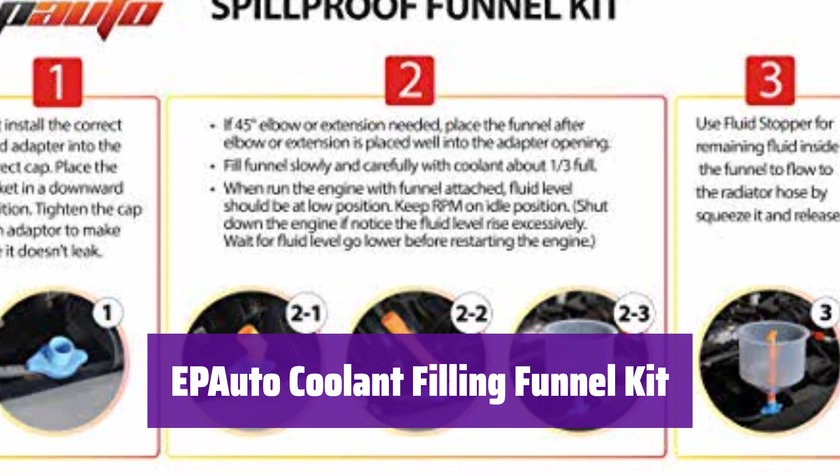Introducing the EPAuto Coolant Filling Funnel Kit. This kit is designed to make filling your radiator easy and mess-free. It helps you avoid spills and trapped air in your cooling system.

The kit allows color matching of caps for dedicated adapters. This feature ensures you're using the right adapter for your vehicle. It's a simple way to keep your cooling system running smoothly.

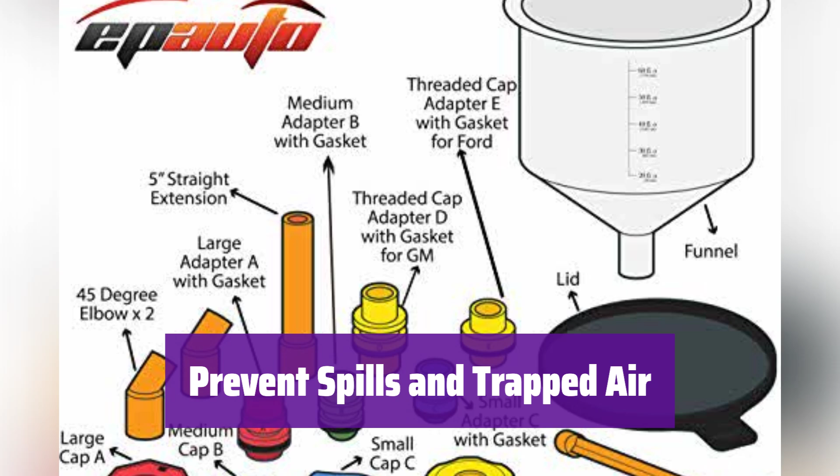This kit prevents spills and trapped air, which can cause problems. Trapped air pockets may lead to erratic cooling system and heater performance. Using this kit helps avoid those issues.

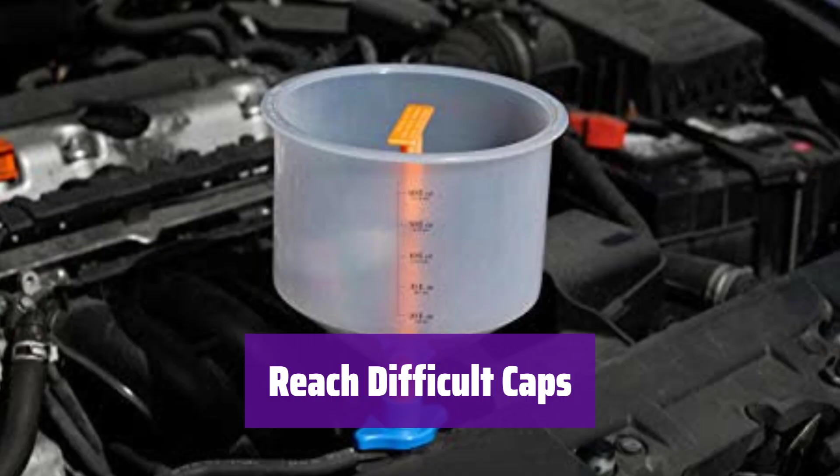The kit includes a 5-inch extension bar and a 45 degree elbow. These tools allow access to caps under shrouds or at an angle, making it easier to use even in tight spaces.

This product is protected by US Patent US1051919B2. You can trust the quality and innovation behind this kit. It's a reliable tool for maintaining your vehicle's cooling system.

What we like: this kit allows color matching of caps for dedicated adapters, which is very convenient. It prevents spills and trapped air. If you like a kit that is easy to use and helps you avoid trapped air, consider this one.

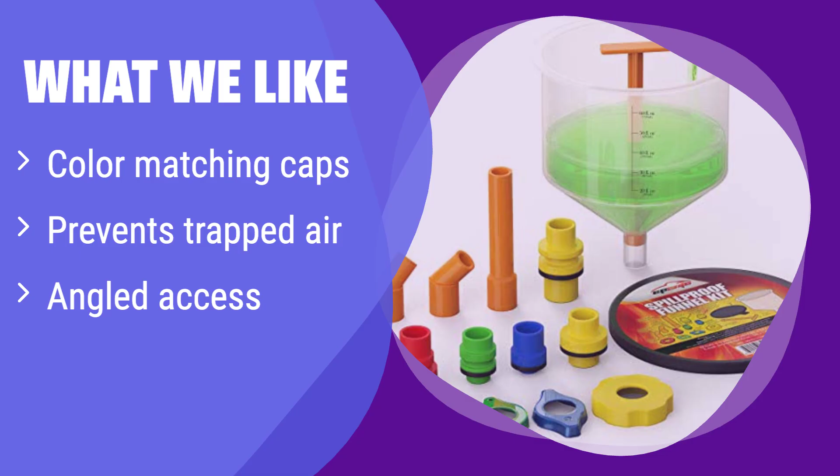Number 2: Thorstone 16-piece no-spill coolant funnel kit.

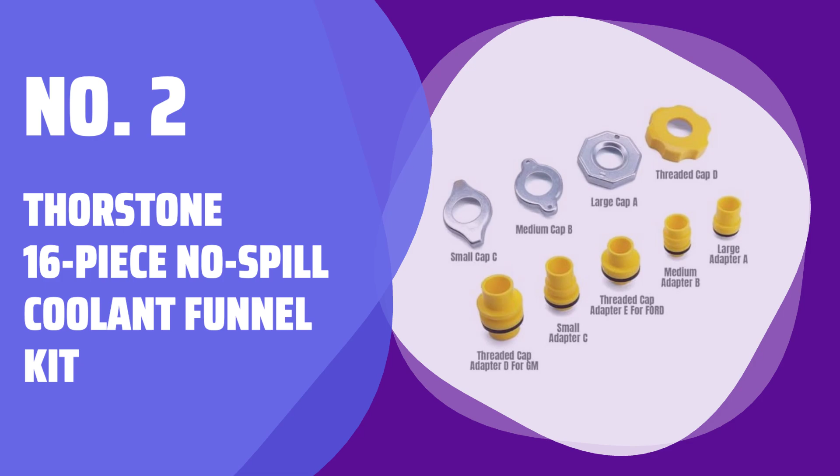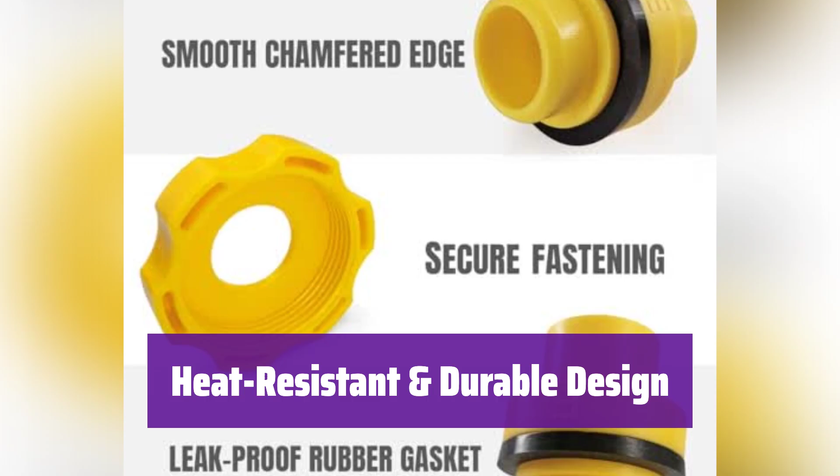This coolant funnel kit is built from heat-resistant ECOPP plastic, which can withstand up to 395 degrees Fahrenheit. The clear funnel design allows you to easily check fluid levels and refill coolant without spills.

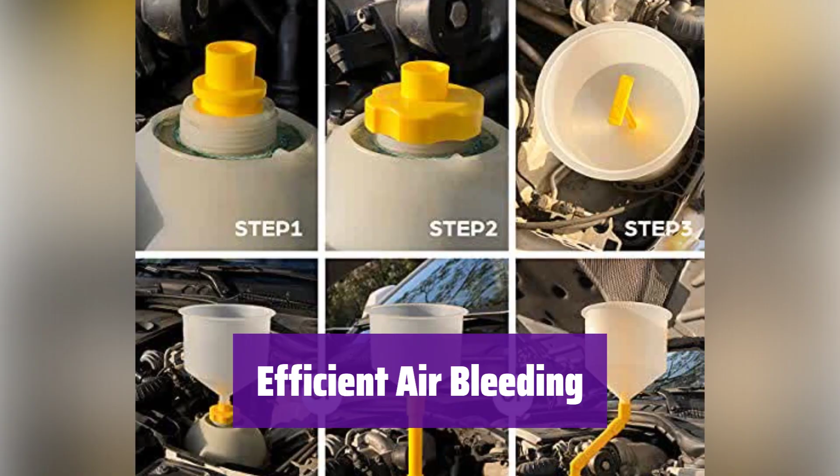This tool is designed for efficient air bleeding, preventing overheating after coolant changes. It's ideal for flushing systems and ensuring air-free coolant flow, keeping your engine running smoothly.

The kit includes a 5-inch straight extension and a 45 degree elbow for hard-to-reach caps. You can combine the components to suit angled radiators, perfect for various engine bays and tight spaces.

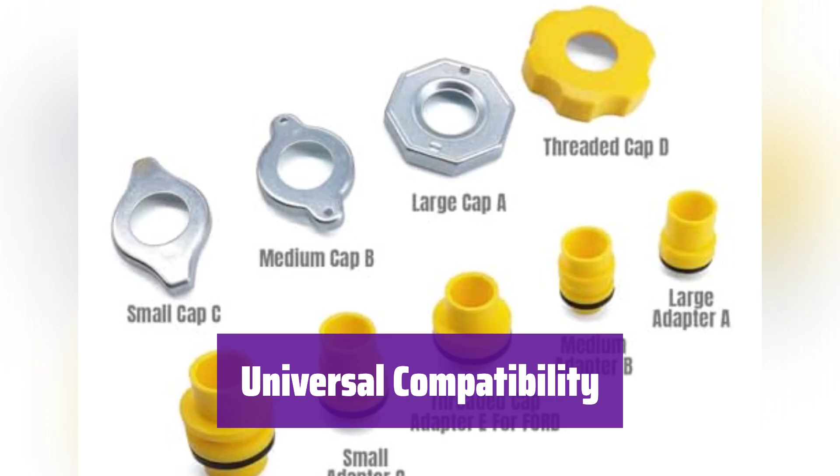It comes with 4 filler caps, 5 adapters, 2 45 degree elbows, 1 5-inch extender, and a transparent funnel. This kit is compatible with most import and domestic cars, SUVs, and light trucks, including GM, Ford, Toyota, and more.

Backed by lifetime product support and 24/7 customer service, the manufacturer ensures hassle-free assistance and satisfaction. They are committed to providing excellent service with every purchase.

What we like: this kit is built from heat-resistant material, ensuring durability. It is designed for efficient air bleeding, preventing overheating. If you are looking for a kit that is built to last and compatible with most vehicles, you should consider this one.

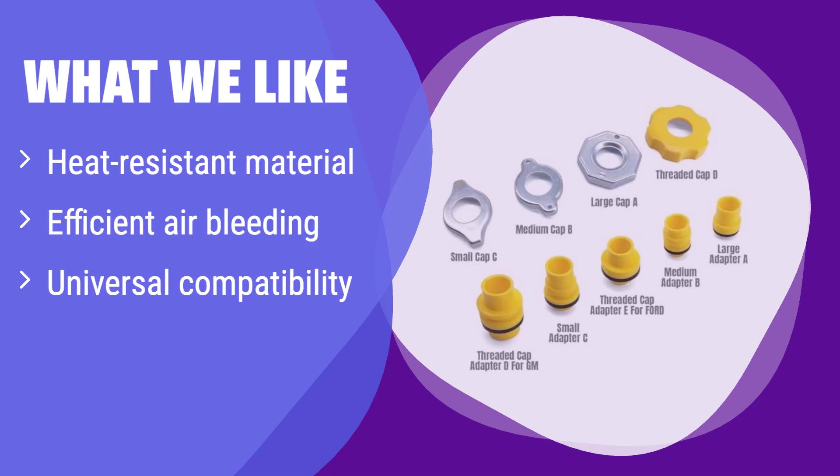What people say: it worked just like it said it would.

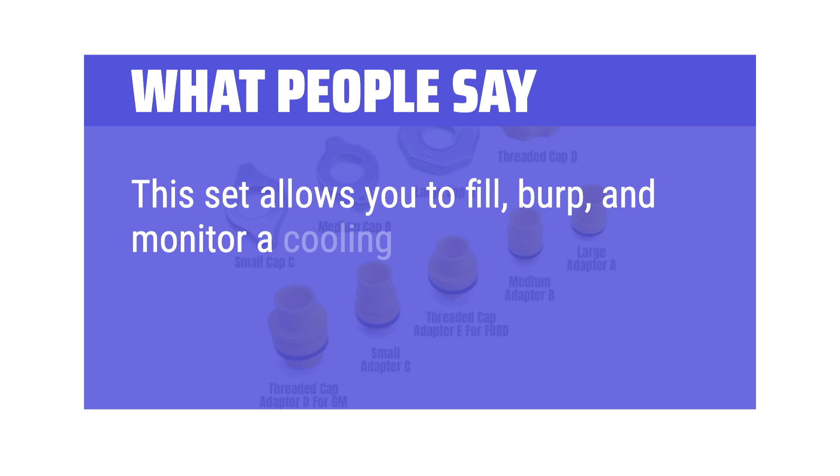This set allows you to fill, burp, and monitor a cooling system without spilling radiator fluid everywhere. Bleeding the system of air is possibly the easiest I've done with this funnel. All the adapters for different radiator caps, and the plunger to plug the funnel for removal with antifreeze still in it.

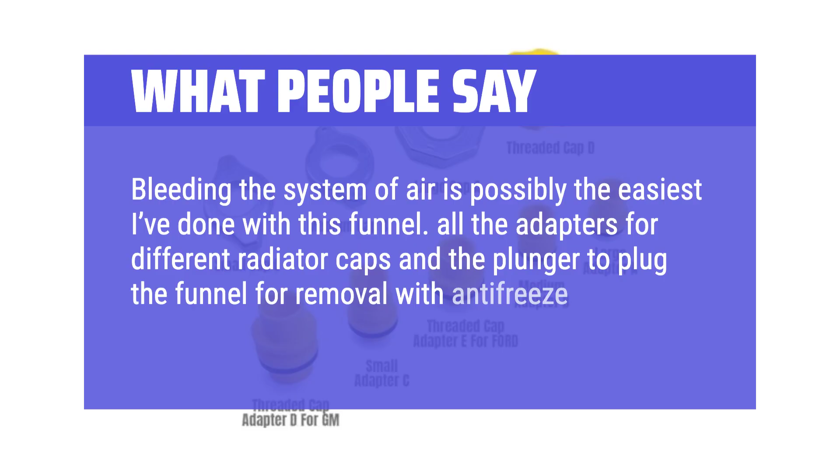Number 1: Ultimate No-Spill Coolant Funnel Kit, 19-piece set.

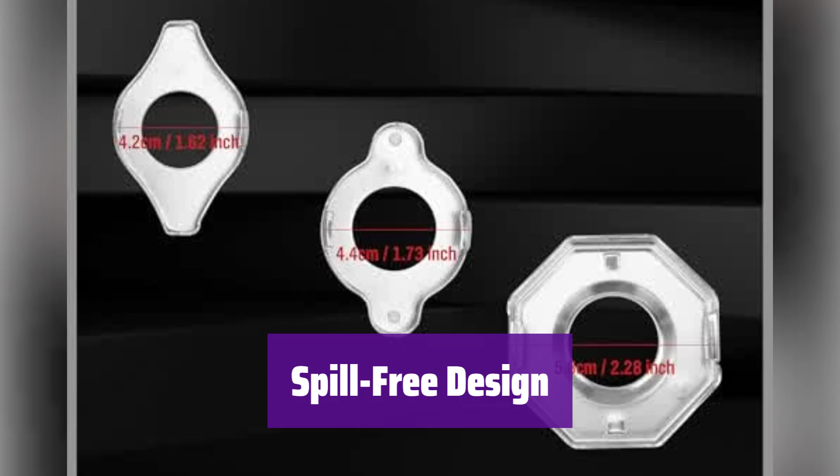Tired of coolant spills? This kit is designed to effortlessly refill your automotive cooling systems without any mess. It prevents squeaky belts and eliminates trapped air pockets.

This kit works with radiators and surge tanks on most vehicles, both domestic and imported. It even includes adapters for GM and Ford models, making it incredibly versatile.

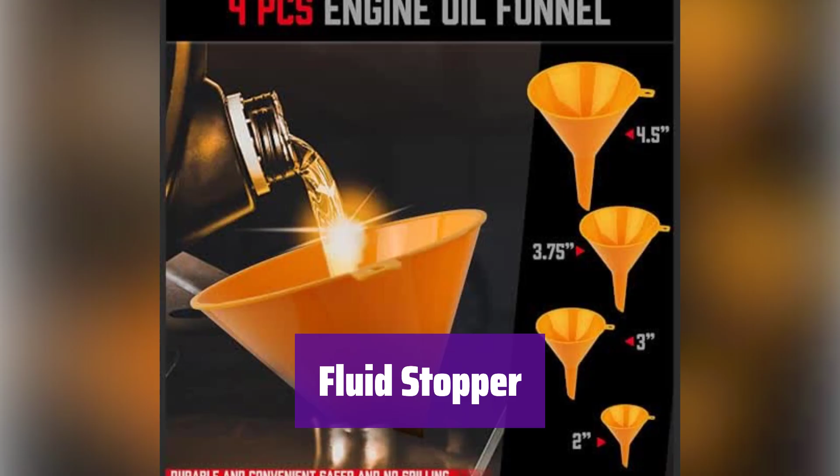No more drips or air bubbles. The fluid stopper prevents leaks when removing the funnel. This ensures a clean and efficient cooling system every time.

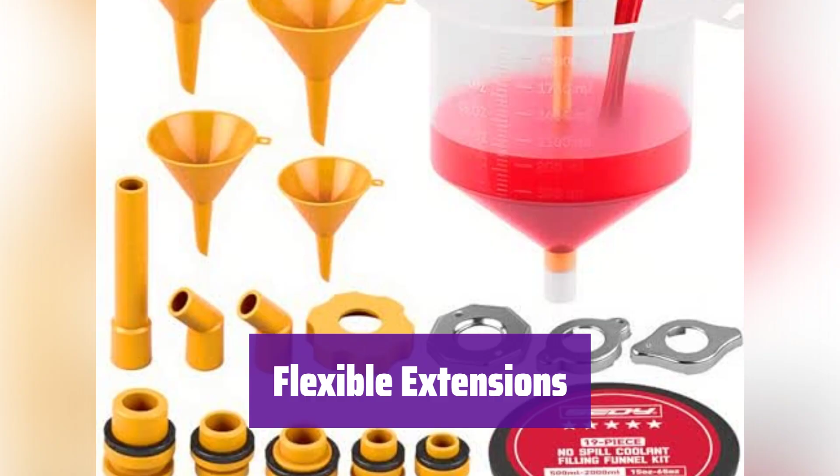Reaching those difficult spots is now easy. The kit includes a 5-inch straight extension and 2 45 degree elbows. They accommodate various vehicle configurations.

This is a high-quality, trustworthy tool set. It's designed to provide hassle-free coolant filling and maintenance solutions. You can rely on it for years to come.

What we like: this kit offers a spill-free design, ensuring a clean experience. It is universally compatible with most vehicles. If you like a kit that is easy to use and works with a wide range of vehicles, you should consider it.

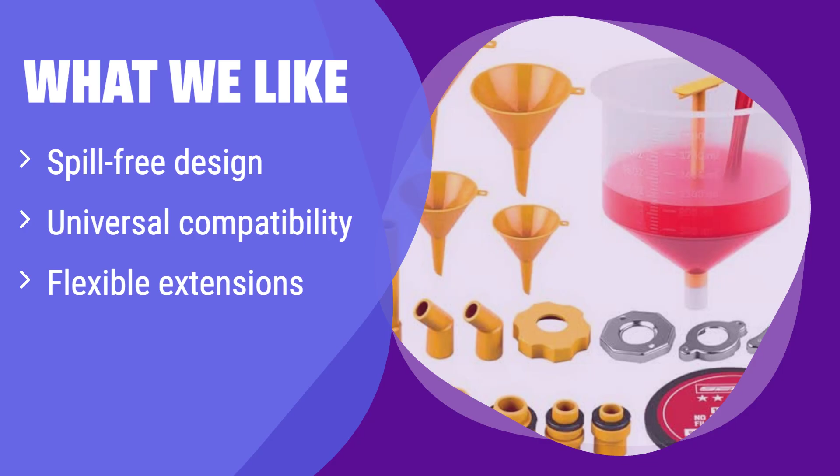What people say: the kit includes everything needed to bleed radiators. The included gloves are a nice touch. The tool is well made and easy to use.